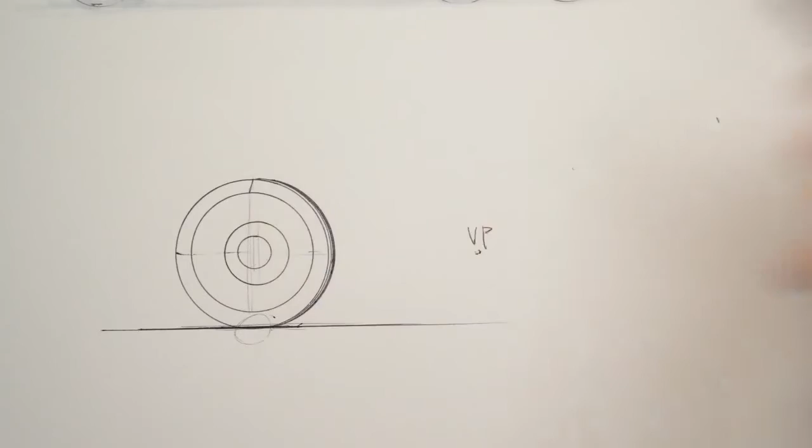So the section through here is basically, we can see my center's offset a little bit, then back out a little bit, and then this is out even further, and then this is back a little. So if I did a little cross section through here, it would look like that in perspective, assuming my vanishing point's over there.

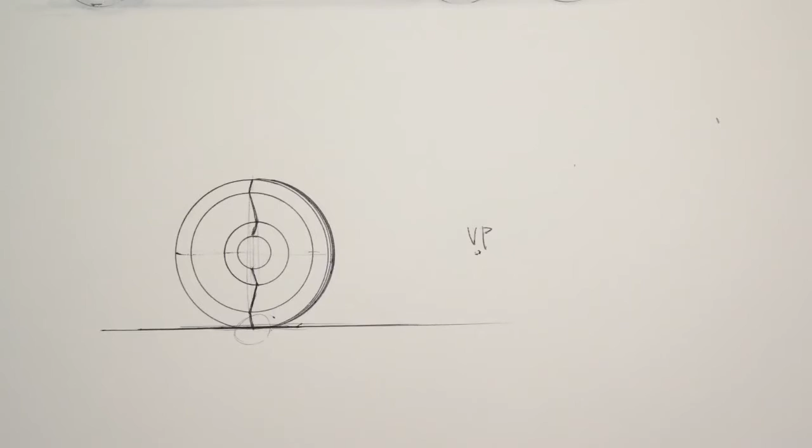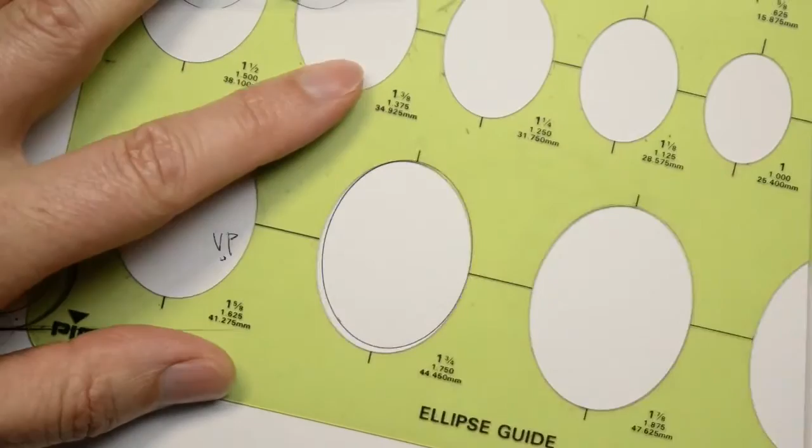So you can see we have a little slight variation. And of course, if you do that with an ellipse instead of a side view of a wheel, like I have there instead of a circle, the way you would do that is I just have a 50-degree ellipse here.

Okay, let me quickly mark off my minor axis. And then all you would do is just slide in and out along that line. I can't remember what page that is in the book, but I know that it's explained actually on a wheel. So I would do something like this, and then I would leave out actually this little bit of line work here.

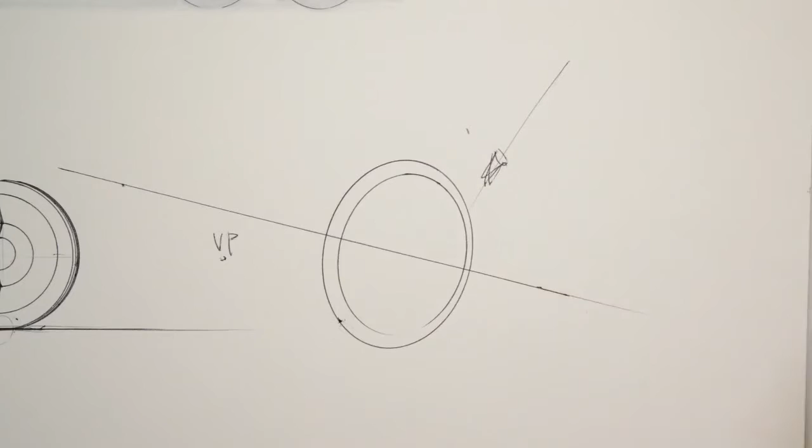And if this is my wheel, that would show like the lights shining down, right, like this. And there's a highlight right here, which sort of blows out that little intersection of the rim and the tire. And then I try to also have potentially a little flat spot there, just to connect it to the ground.

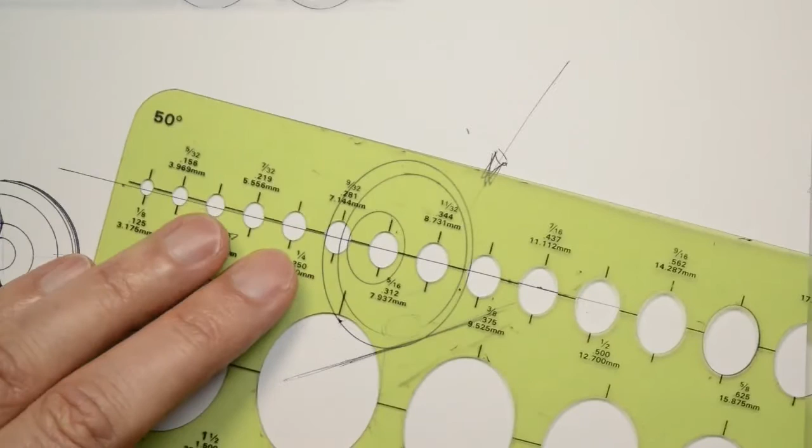So if we're redrawing that other wheel we just drew in perspective, this center then would offset. So you can go in or out as much as you like, and that'll be the amount of dish on that wheel. And then maybe the center pops back out just a little bit, like that. So that would be my wheel using that minor axis of 50-degree ellipse.

And then here's my center. I don't know if that's actually the true center, because from where I put my ground, this ground looks incorrect for this to be true vertical, because true vertical touches there and there. So that would have to be the ground plane for this perspective grid. So like that would be the ground plane.

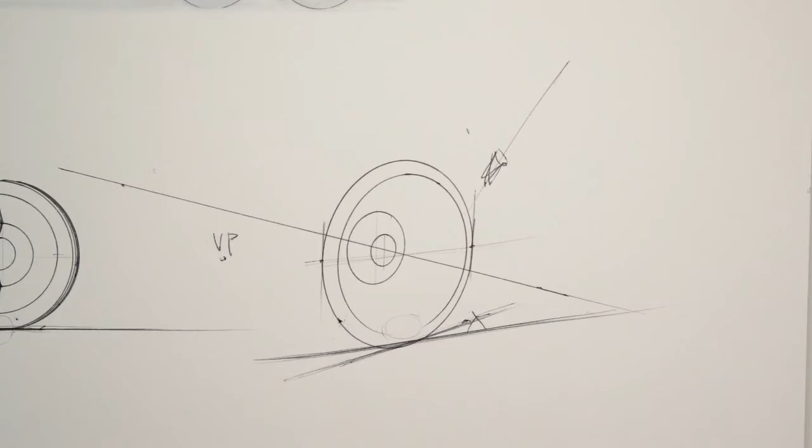And that's again earlier in the book, Thomas covered that, placing ellipses into perspective. Now I can use this true vertical with this adjusted new ground plane. Let's get rid of that one. So vertical, vertical, and vertical here on the outside.

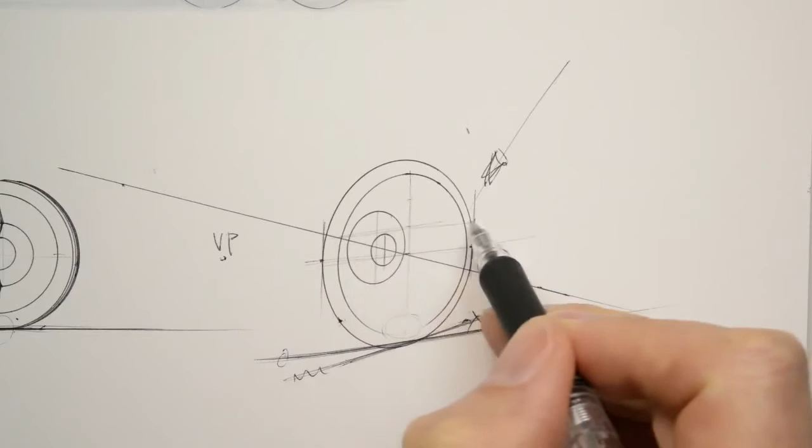And then let's just quickly put a 5-spoke pattern in here. So I divide the top into thirds, take the bottom third, extend it over, and then divide the bottom into half, and then quarter, and then just a tick below that. Those are the other points.

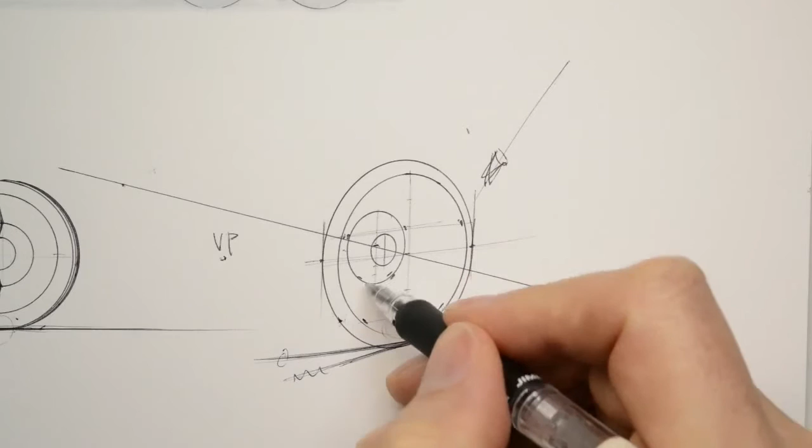And then I could do the same inside here. So that's going to go there, there, and then I'm doing it on this ring, the intermediate one, and then here and here. So I use my height line to locate those 5 points on that circle. So say we put just some slots into this, that one's going to look like that.

This one is going to be thinner. It's more foreshortened, so it's got to be thin. This one's also pretty thin. Okay, and then this one's a bit fatter.

You might say, well, how do you know exactly how thin this one is versus how fat that one is? Well, if you just add some thickness here to your height line, you can do the same thing. Draw across the top—this will be the top corner of each of those slots, and this will be the bottom corner.

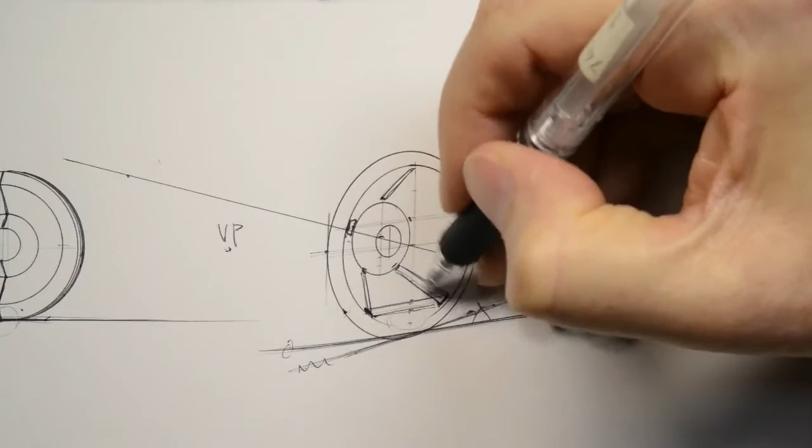You can see how on this angle of the rim, this gets foreshortened. On this one, we look more perpendicular to it. That's why this one's fatter than this one, and this one's really fat this way, but super skinny that way.

And so go around. All right, so I could do the same here. I could take the corner over, and take the bottom corner over, and make sure the width is the same. That'll tell me how to do that.

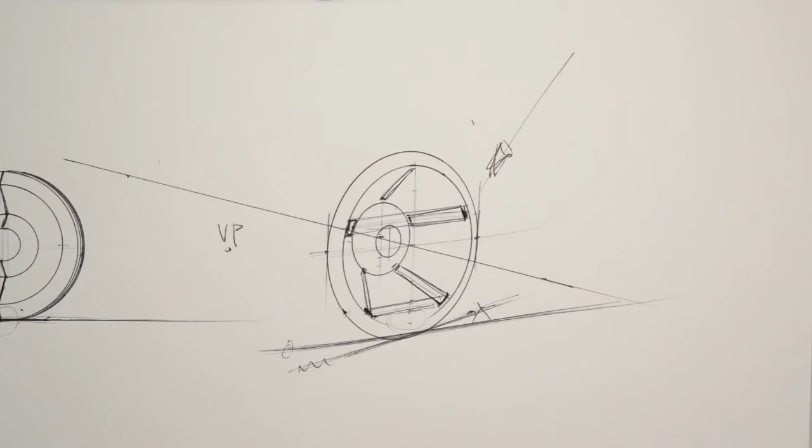So that's how I would do the wheels once they're in perspective, but let's go back and finish off this little sketch.

So with this little sketch, let's grab my circle guide again, and I tend to go in and do the wheels first. And this is not a super efficient way of sketching.

If I'm doing production work, I try to not do wheels actually ever. When I'm doing production work on a movie or video game, that sort of thing, or for toys, what I try to do is have these wheels already done.

So I might already have a Xerox copy of those, or a lot of times I'll just leave them out and leave them blank, just do the tire, and really just focus in on the body, and then scan that and replace those wheels with CG wheels that I would do in Modo, for instance. I did a lot of that in our book Drive, where I would replace and combine 2D and 3D.

So this, I think, is looking just fine. And when I'm working personally and trying to make nice sketches in my sketchbook, a lot like the sketches you see—those came out of my sketchbook, the ones on pages 164 and 165—those sketches, I would spend more time on them and detail out the wheels, trying to make a nice sketch at the same time.

And there's no time constraint for those. Those are just personal sketches. And so when I'm doing personal sketches, then I like to go in and just detail, because of how big a difference a nice set of wheels makes on a vehicle.

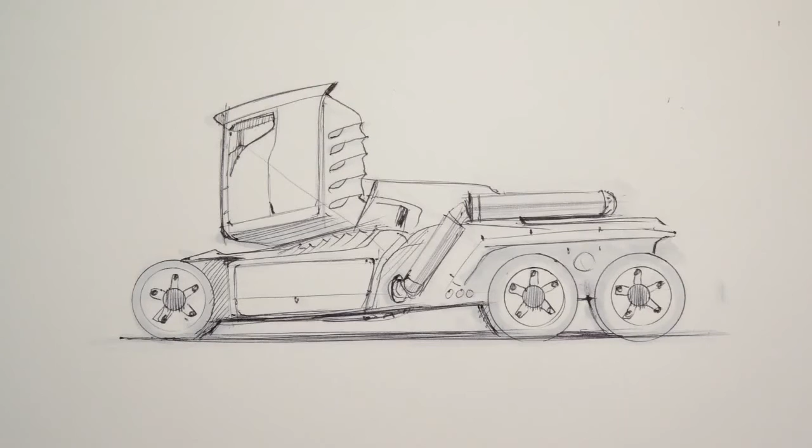Okay, let's talk a little bit about the classic quick sketch, perspective quick sketch for wheeled vehicles. The classic quick sketch for a wheeled vehicle is usually done with a very low point of view and a very long lens, but it's also a cheat. I'm going to explain why it's a bit of a cheat.

So let's think a little bit about top view before we get into this classic sort of front 3/4 low point of view. When we're looking at a front 3/4, let's just draw a small car here in top view.

Let's say it's got, let's pull the front out just a little bit like this, and let's say that the front wheel is there. So this is my top view, and I'm just looking through it. Those are my front wheels, there's the front of the car, it's got a little V section to it, and those are the rear wheels. Okay, now when I look at that, so this is top view.

Now, when I'm standing there, and this is just like the schematic that's later in the book about lenses and vehicles. So I'm jumping ahead a little bit here, but this is a nice one; we have to sort of explain this a little bit before I jump into the sketch. So we're standing here and we're looking at this vehicle. Now, if I'm, say, standing here, okay, and I'm looking at this vehicle like so.

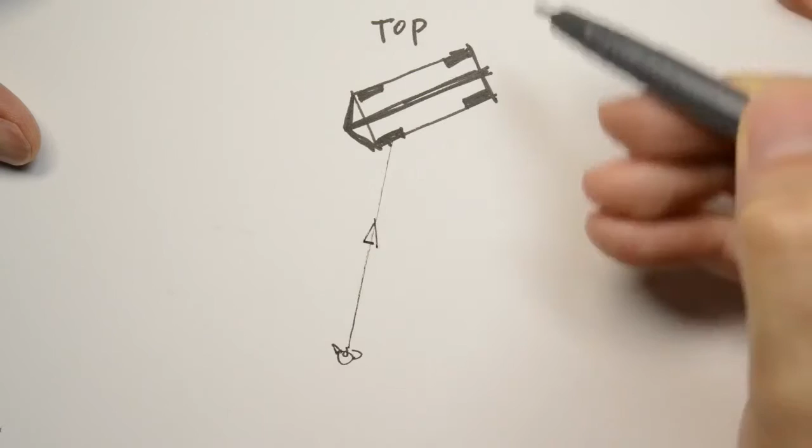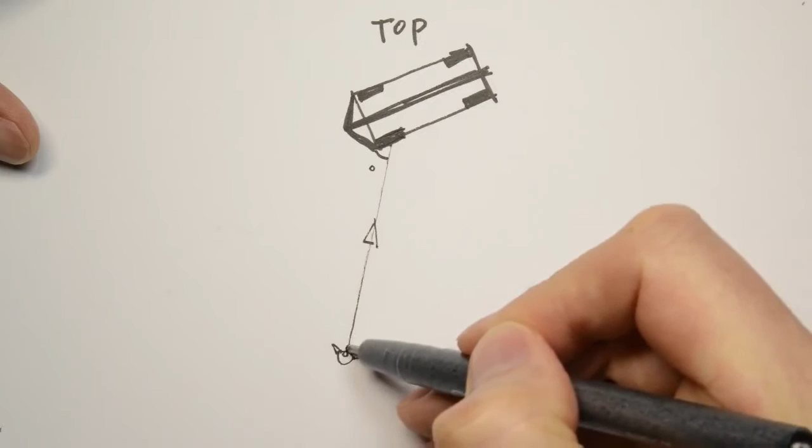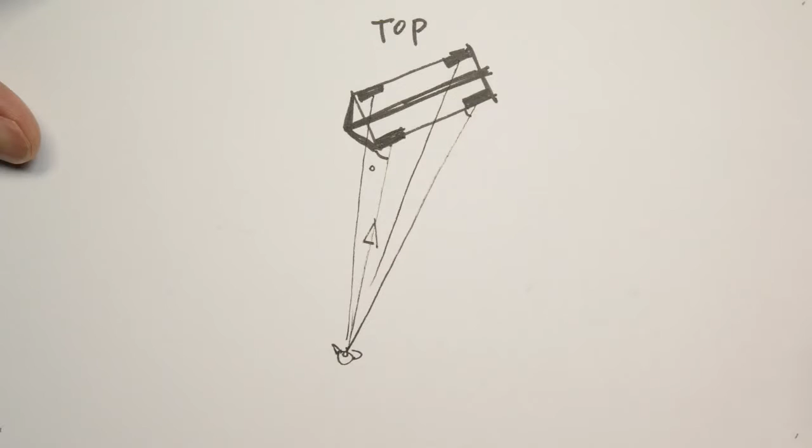All right, the angle that I view that plane of the wheel is the degree of the ellipse. So that's the degree of the ellipse. The angle I view the rear wheel, okay, is the degree of the rear ellipse. And then same thing goes for the other ones, the far side, here and here. And so you can see that this is a smaller degree. Let's make that a little bit fatter, a little pie shape there.

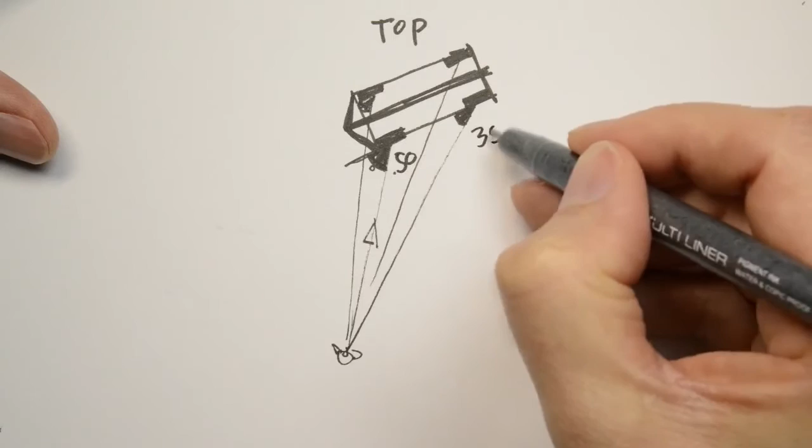And then this is, extend that plane of the side of the car. That one's much larger degree. And then this one is even larger than this one. So if this was, say, I don't know, like a 50, this might be 35 degree, and then this one over here might be like a 60. So it's like a 10-degree change from this side of the car to that side, plus, right? Plus 10 degrees to the other side. And then this one looks like about a minus 15 degrees from the front to the back.

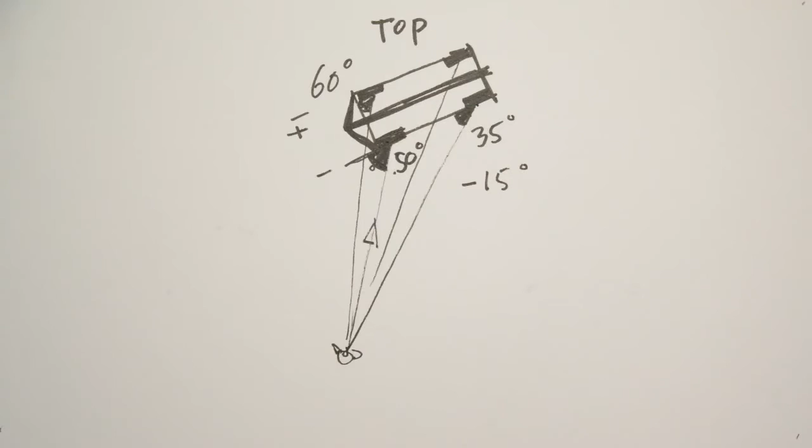So if I translate that to a quick sketch, just thinking about that grid, right? We'll start with something like a 50, and then foreshortening those three wheels, and then something like a 35, and then sort of barely see the ground plane. And then on the other side, it would be like a 60 to turn the corner, so that's 3 wheels wide, and then this one's like 10 degrees larger than this one. And then that one back there would be sort of right in between this one and this one.

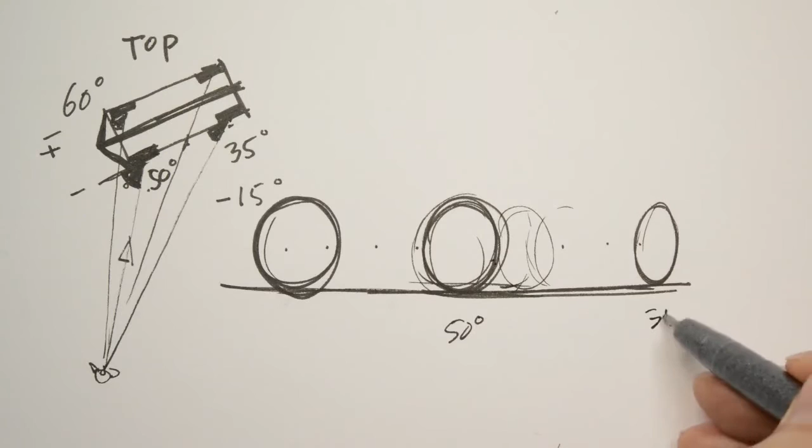So that's going to put it probably 45-ish, somewhere there, 40, 45, depending exactly where it's at. So it's probably a little closer to this one. It's probably more like a 45. So if that's a 50, that's a 35, that's a 60, based all on this top view. Now, I was just guessing, but that's my quick sketch estimate of those ellipse degrees.

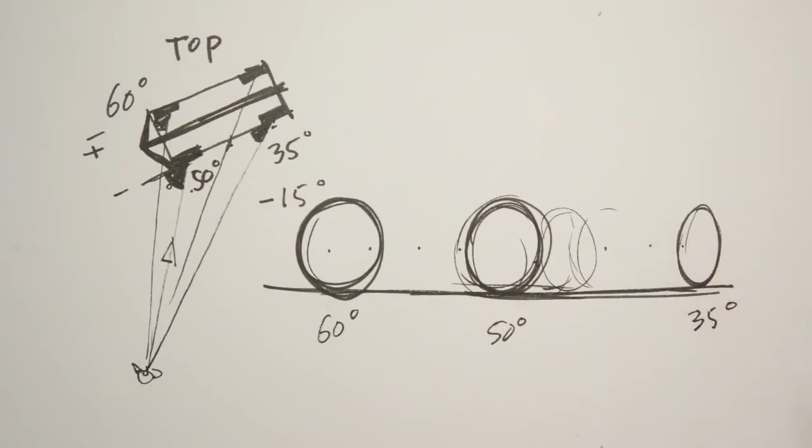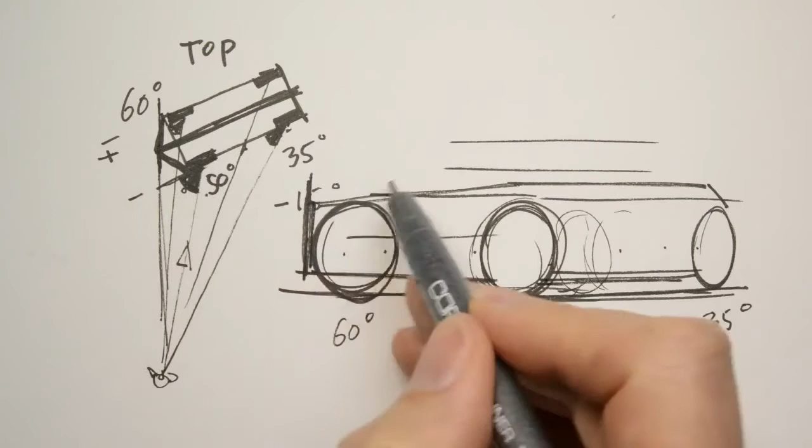Okay, the other thing that's really important before we get into this classic sketch that's going to be on this perspective grid right here, you want to also think about where's the center line. So the center line in this case, because it sticks out quite a bit, would hide the front of that wheel. So there I would actually know that the center of my car is right about here. Okay, and so that would be the center of it, and we don't see the other side. It's hidden behind, but it's only slightly ahead of the front wheel.

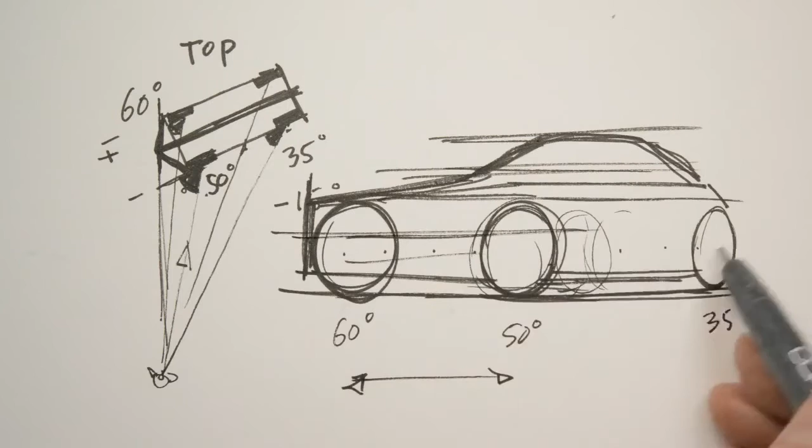And this is the way that we're going to actually measure, make a nice, really ugly car here. So that's my center line, for instance. The way that we're going to measure and place our center line and all the elements that are going to be placed left and right in this perspective with a really flat lens, long lens, which is also called a flat perspective because there's very little convergence to the right vanishing point or to the left vanishing point.

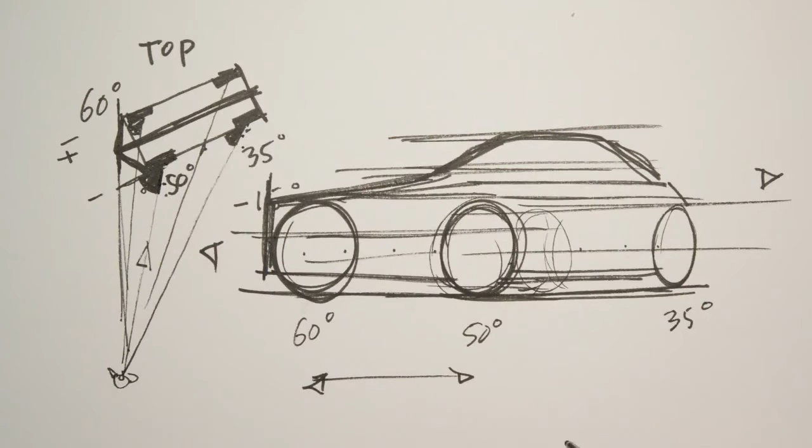So with that slow convergence, this is actually the cheat. We want to draw it with slow convergence left and right because it makes it much easier to draw the car. But if I look at how close I am to the object, I see that this is quite a big visual change from 50 to 35. So the classic cheat is to do like we're pretty close to the car for the wheels, and then to just treat all the rest of the guidelines going to the left and the right vanishing point.

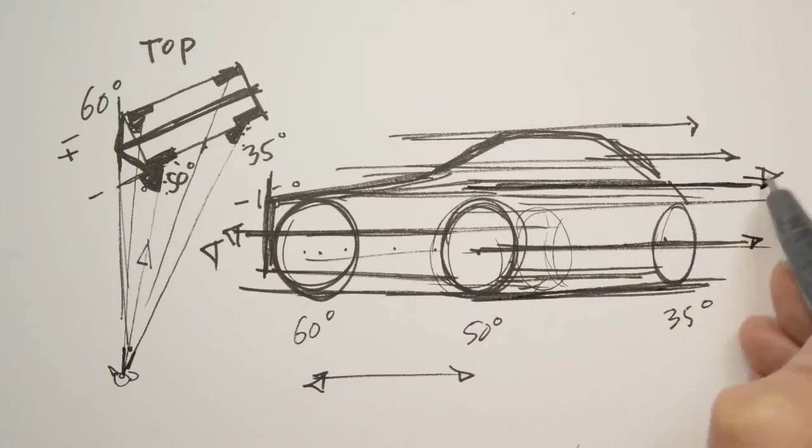Sorry, this one's going to the right, the length of the car, like through the wheel centers, going that way, or along the ground or the shoulder. Okay, going to the right vanishing point, and across the top, across the front of the windshield, for instance, that would go to our left vanishing point. But to draw those with very, very little convergence. But I can see I'm actually pretty close to the car. So this is the cheat. We tend to draw these with less convergence, okay?

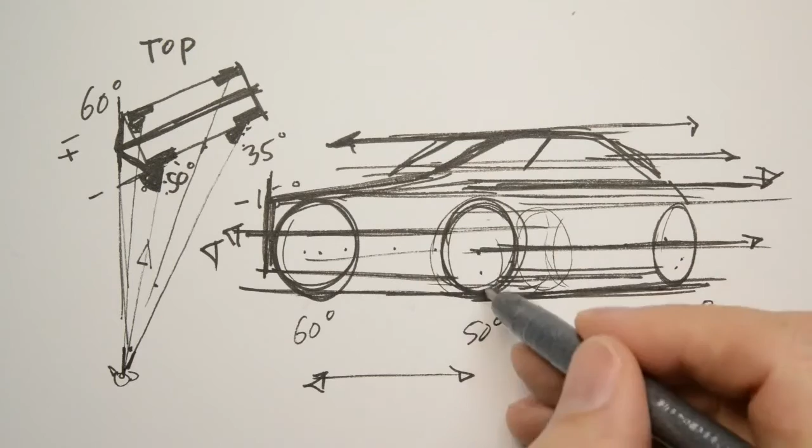And the way you could always get around it and say, oh, well, the front wheel's turned a little bit towards us, and that could increase this by 10 degrees. Because if I look at going further away from the vehicle, like this long lens would suggest, the long lens here and the flat, slow convergence suggest we're much further away from that car.

So if that was the case, and we were much further away, again, here's our little top view, and if we were way back over there, and in fact, I'm going to be out of frame, I'm going to be so far away, and if I look at, well, let's just put a little point on it, and if I draw guidelines here, sight lines, back to where I'm standing, way off the page, you can see now the degree change between here and here might only be 5 degrees from the front wheel to the back wheel.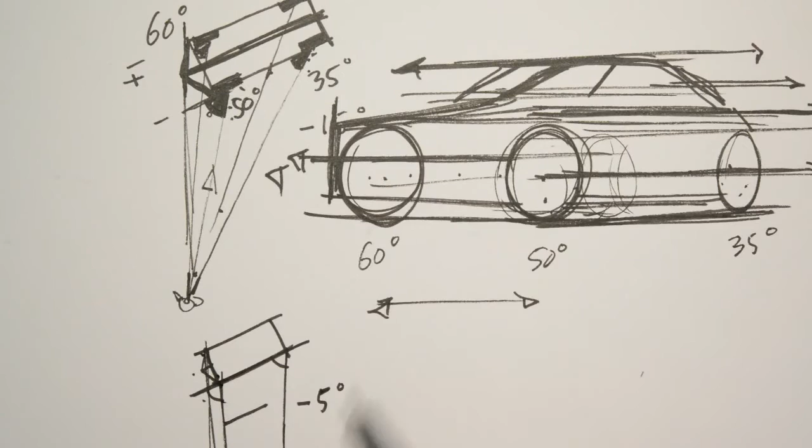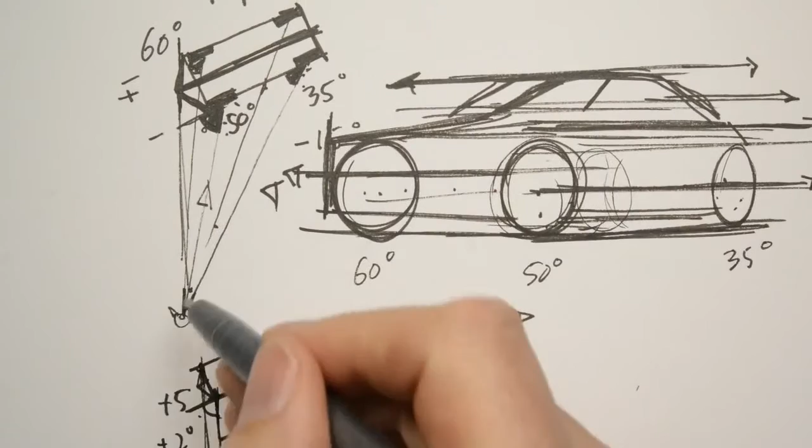And from this one to this one, it might even be the same ellipse if it's a really, really slow convergence, same degree, or maybe just like a +5 to the far side. But here you can see it's almost in line. So this one's going to be more like a +2 degrees. So point being, the degree that you sketch your ellipses with here determines how close or how far away we are from the car in top view. And how close or how far away we are should influence the speed of the convergence.

So how would we do that more accurately? Well, the box I would draw for that would just start with drawing a box instead of starting with the ellipses. And then I would say, okay, well, there's my ellipse. That's going to set the lens, right? I'm saying that's on the side plane. Let's go to the middle there. And then I would just start to multiply that down the side, and then in my fourth wheel here, I would have the proper degree by multiplying those squares. And I would have the convergence set properly.

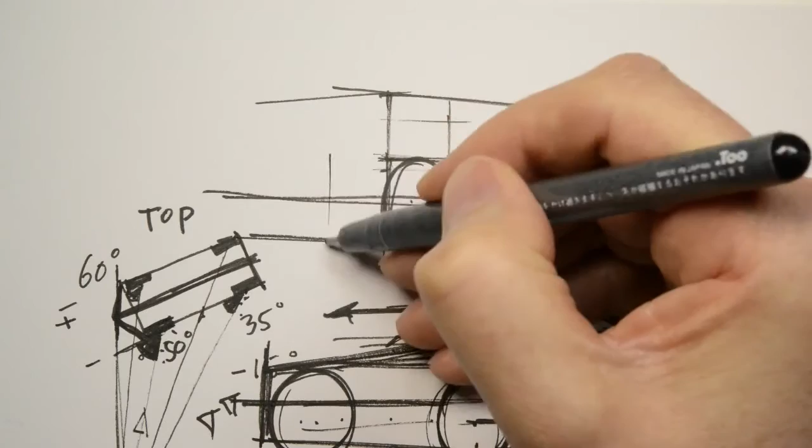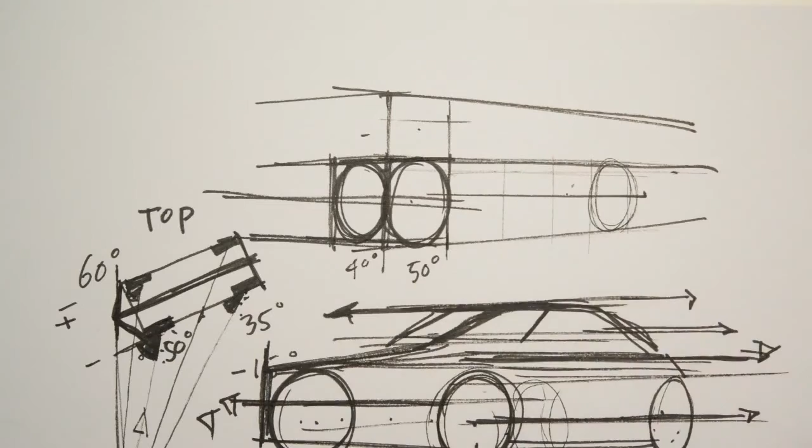And then you've got to go to the other side. I go this way. And what I like to do when I flip to the other side is, if this is like a 50 degree, then this one on the other side would be like a 40, because they equal 90, right, in this low perspective here. So if I flip the degree on the other side of that cube, those two ellipses make, then that would be like a 40. A true 45 view, of course, these would be equal, 45-degree ellipses both sides. In this case, we see a little bit more of this side, a little less of that side.

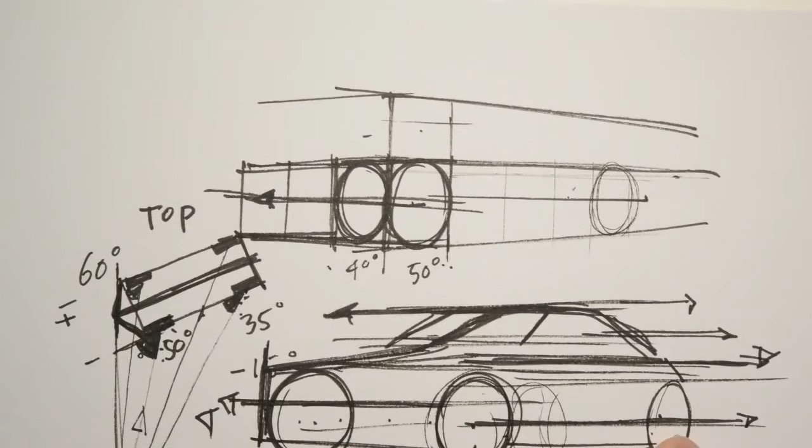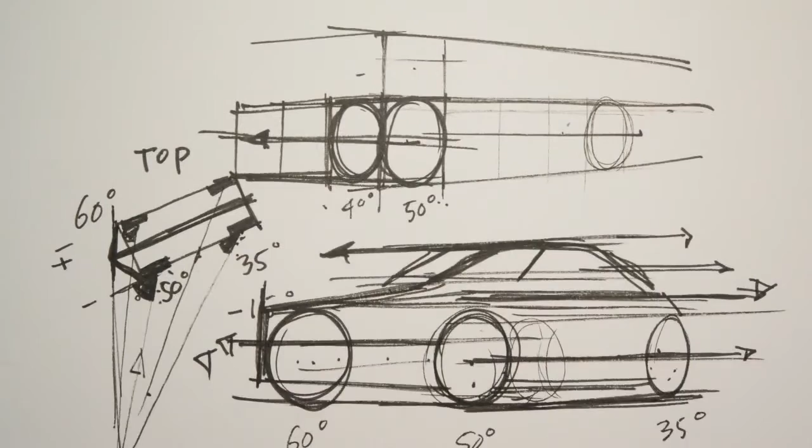And then you multiply that across 3 wheels. There's the width of my car. I could draw a box, take it across. And all this is in the chapter coming up. So I know my timing here is a little odd. But before you start drawing things in perspective, you want to have some good ideas. And that's what this one's supposed to be about. So that's back to things more like the earlier part of this, which was about just coming up with ideas first that we'll draw into perspective. So I'm jumping ahead here a little bit, but I don't want the next video to be so incredibly long, because there's a lot I'm going to cover in that one about drawing specifics of the vehicle form. So that's the underlying thought process behind how to set up the quick sketch.

So now let's actually do the quick sketch. Okay, so now let's do one of these cheated quick sketches where we just think about what we're drawing and not really so much about the perspective, just really thinking about the wheels. So the classic car sketch goes something like this. You start with a large front wheel. That sets the view, right? The minor axis is here. I can see it's pretty much level. So I'm going to draw a line level on the ground. I'm going to draw a line across the tops of the wheels.

Then I'm going to go to the back wheel. And then I even still estimate a little bit of foreshortening to the back. And then let's draw, that would be the same height wheel. And then I just throw a couple guidelines, and you can see the guidelines have really almost no convergence to the right, or to the left. So it's a very, very long lens shot. But we're still going to cheat the wheels, and we're still going to do like a 15-degree change from here to here. And then this is how I usually measure out the front.

Take that and do a little bit less, okay, as if this is a 50 or a 40 degree. And then I just take that, estimate the foreshortening across. That's the front of the far side wheel. And then I just draw an ellipse that's a little bit fatter than this one. Okay, and then I usually draw 2, and then that's going to be the tire that I see on the far side, right there.

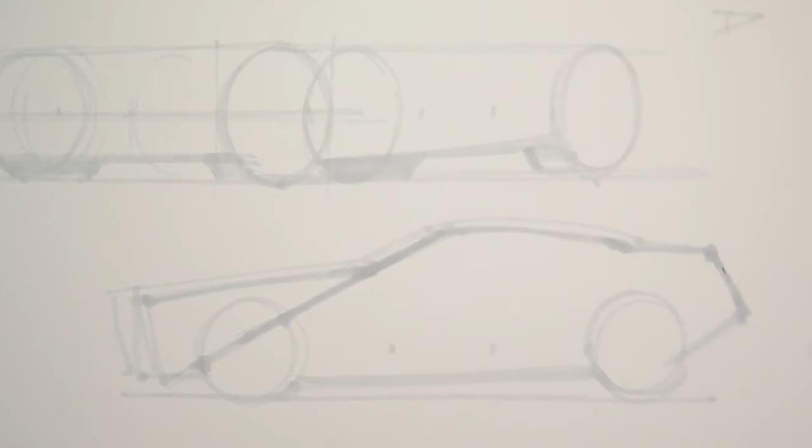So what I like to look at is that line right there, and where does that cross that wheel? And that's a key line, and then I'd like to think about dividing up the wheel itself and say, okay, what's my front overhang to the corner? Well, it's about half a wheel, a little bit more than half a wheel. What about above the wheel? Well, like a quarter above at the center.

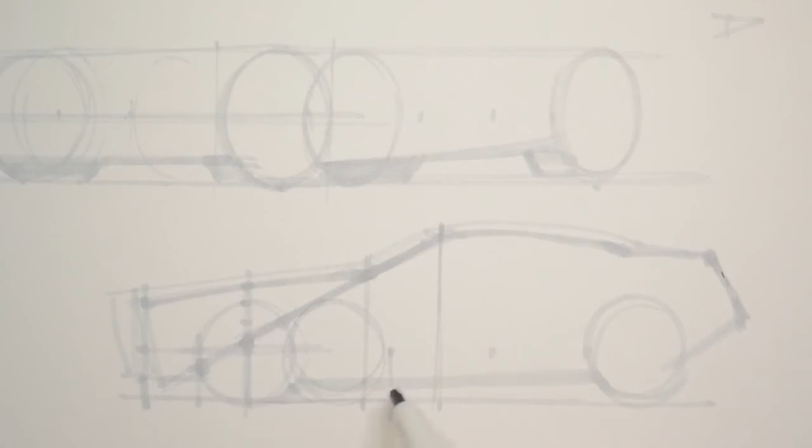And so that's how you start to transfer. It's just transferring a side view, right, into perspective, which we covered earlier. Again, I can't remember the page, but we did talk about it in detail. So I'm going to look for those angles. Well, this goes a little bit below, that goes through there. The apex is at 1.5 wheels, somewhere about there. It's about here in height, and so there's the angle. So that's that angle put into perspective.

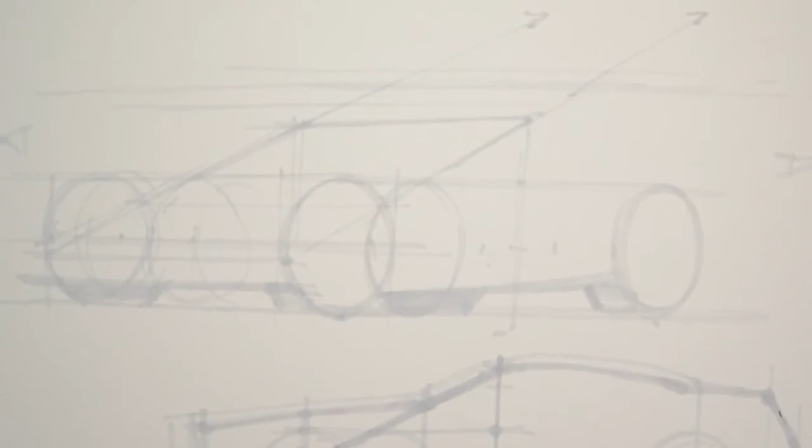There's the angle. That's actually a ramp in perspective, right? Those lines would be converging to a point above the vanishing point, the right vanishing point. And then there's no tumble home added yet to this. I'm throwing in terms now that we haven't covered, but they're in the chapter coming up, so it is explained. And it's also in the glossary.

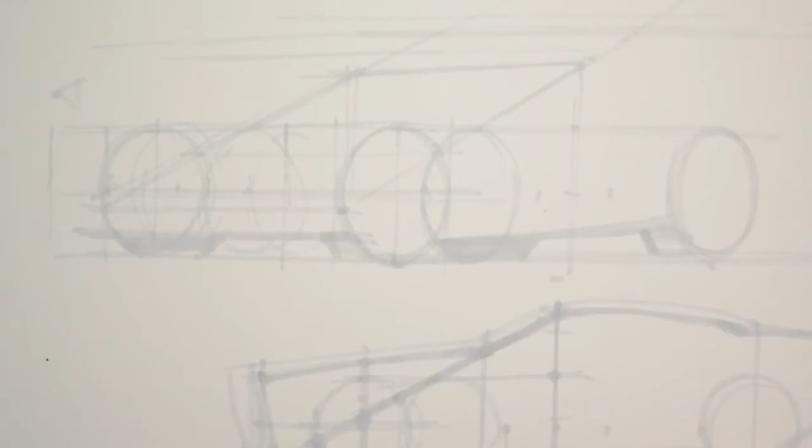Okay, if I want to add this line to the front, how do I do that? I estimate ahead half a wheel. Here, I estimate ahead half a wheel over there. Okay, and this is quickly turning into not so much the quick sketch and now a full-blown construction of this box and these wheels, but that's okay.

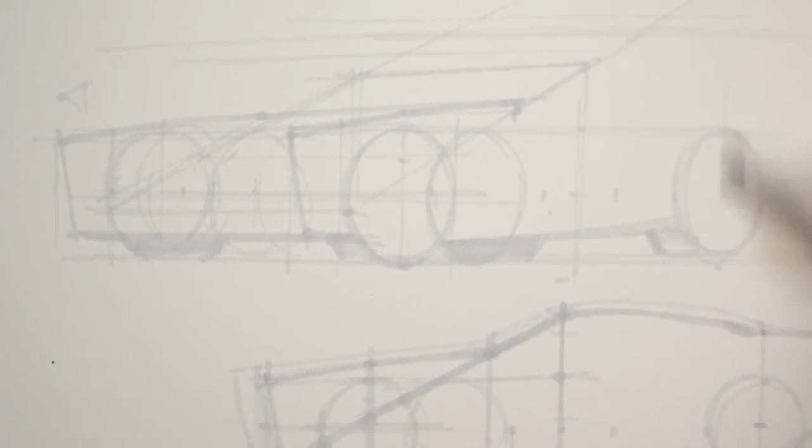All right, and then that goes over this by about a quarter, and it hits that angle right there. So I'm looking, where's the height, sort of top of the wheel out is the top of the hood, and we go to there, maybe a little bit lower, and across and back over the far side wheel, and then straight across. So you can see I'm translating that side view, and right about there probably.

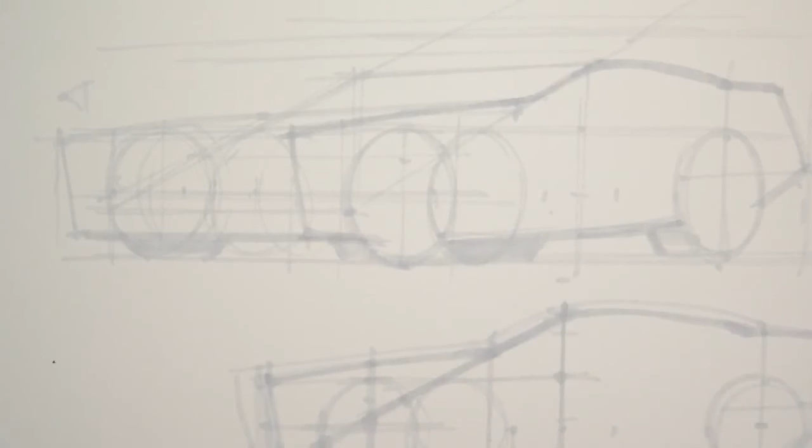And what's the overhang? A little bit more than half a wheel. There's half a wheel, a little bit more. Height is about there, and angle looks to be about something like this. Level for a bit, and then into that roof line. So there is my foreshortened side view, also similar to my center line, in perspective with my wheels.

And now we could add tumble home. I already made that line too dark, but it's okay, I'll darken it. And that's going to lean in the sides. That's going to take that pillar and move it here, move that roof line over. And then I should have found center already. I could do that here at the front. Okay, and then I'm going to pull that center line, and then I'm going to pull it forward a bit.

So now I'm just adjusting my center line, just like we did earlier with XYZ section drawing. And let's find it again here, so that's where it would hit. And then I'm going to adjust it there. So a little curvature across the roof. And now we're just basically readjusting this form to give it a little bit of a convex surface across the top. And then you can start to put in whatever details you want.

All right, then we have a grill. Maybe I want to pull the sides in to here. Pull the sides in from each side. Okay, and that's going to affect this line, right? And that's like a two curve combo right here. And then let's put another little air intake. So that's kind of where it's heading now.

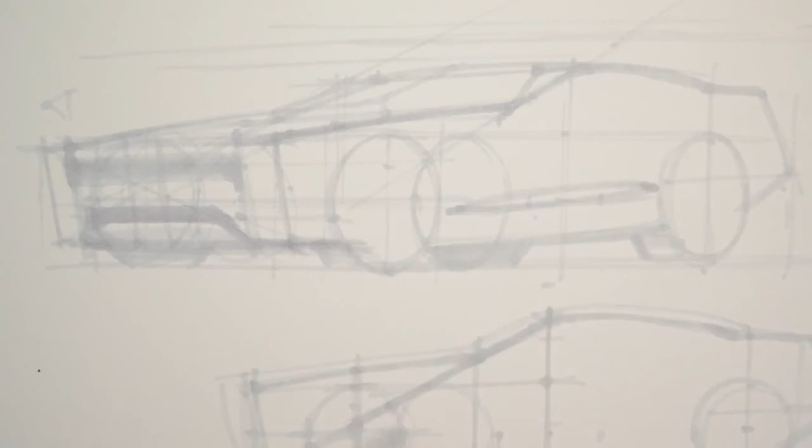That's the more technical, slower explanation of doing the quick sketch. But the quick sketch, once you've done this construction a few times, is an abstraction or just really a guess at doing that. So when you start to then draw that, once you've done the construction and you do it more from memory, then it becomes more of, let's just use a nice dark pen that you can see easily. Then it becomes like this.

You set the ellipse for the front wheel. We barely see some of the ground plane, a couple of tick marks to get my proportions for the rear wheel, and then estimate my width, 3 wheels wide over to there, and then maybe I just draw something like that. Add a little thickness, little thickness, little thickness. Maybe see the far side back tire, a little bit of rake, a little body sculpting, and headlight shape, and then foreshortened wrapping headlight shape on the other side.

Angry mouth. This line comes around here like this. Ground plane. Like to have those wheeled vehicles connected to the ground. And then up, and then pillar down the back to the rear of the car, and then up and over. This is a 2 curve combo, and there's the base of the windshield, incorporating some tumble home, window graphic, header across the top of the windshield, door cut, and maybe a little design line or a little fender blip.

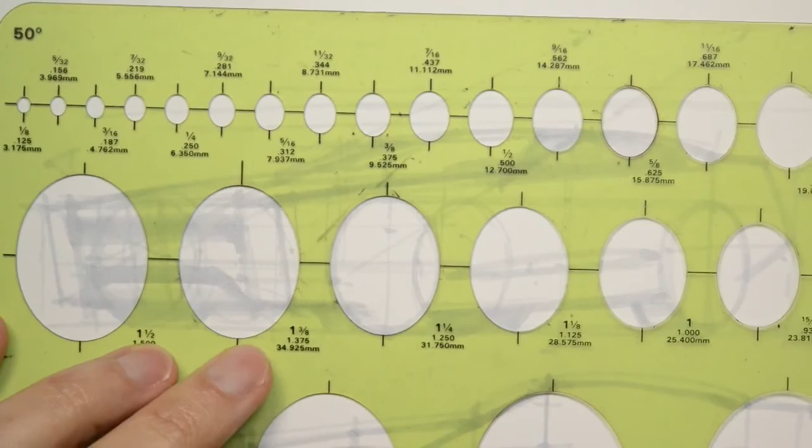And in fact, now I could go back with this one, add a little bit of quick line weight to it. In fact, let's tighten it up with some ellipse guides. Let's see how close I was today with a 50, a 35, that's what I was guessing at, and a 60. Those were my estimates. Let's see how I ended up. So what you do to clean it up, just what I showed before. My 50 is looking pretty good, like a 50 actually.

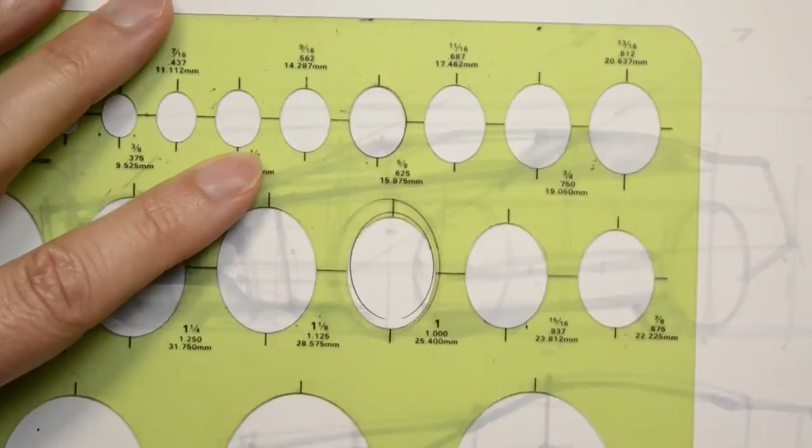And what I do is tire outside, and then I let it fade to the front because it has a soft radius on it, and then wheel. And I offset it a little bit to show that there's a little section to my tire, and then let's throw a little deep dish center on it, like so. Now for wheel well that cuts over the wheel, and I'm just going to darken the ground and the connection to this front wheel here.

I'd like to now add a little bit more convergence, so pick that line up a bit and let it converge. All right, so that guy's going to go up just a bit, so I'm building in a little bit more realistic perspective convergence here. So this one's also going to come up a little bit more, so we see a little bit more of the ground plane. So over there we see a little bit, and then we can see a little bit across the back of the shadow here of the car in top view.

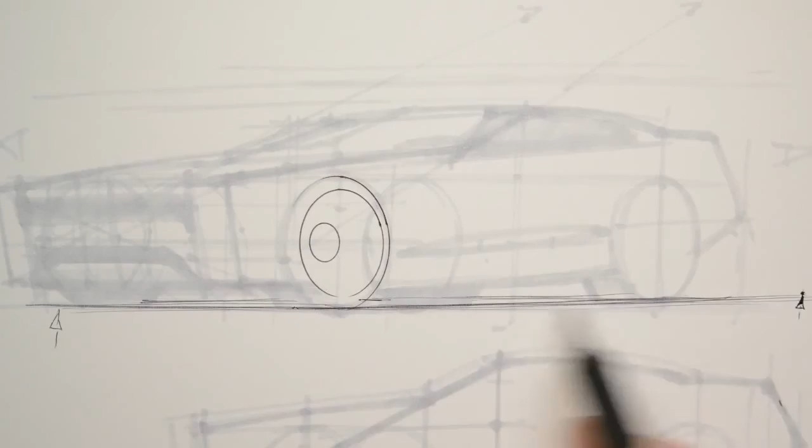And what I do for the wheel well, if it's supposed to be a round wheel well cutout, is take the same ellipse guide like this, and then I tilt it a little bit because I know the side body is probably, we're looking at the front view, and here's my tire, right? And here's the ground. Here's the outside of the car. Probably we've got a little ground clearance. We've got a little wheel well that covers the top of the tire. So it sticks out a little bit, and then probably a little bit of side body, shoulder, fender lip, and then rolls back under, generally speaking.

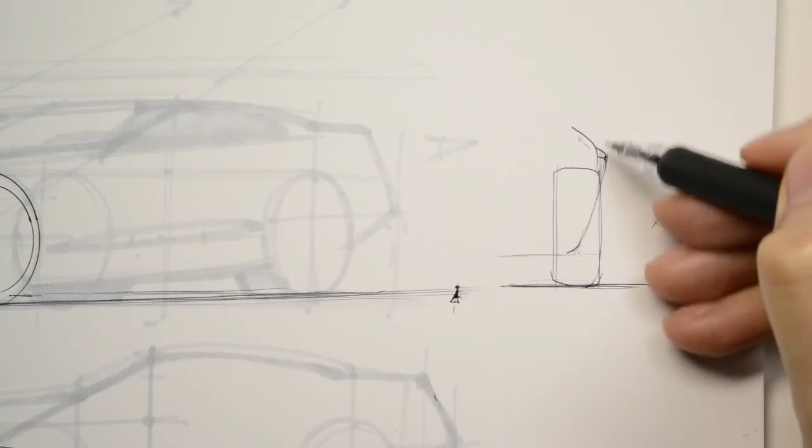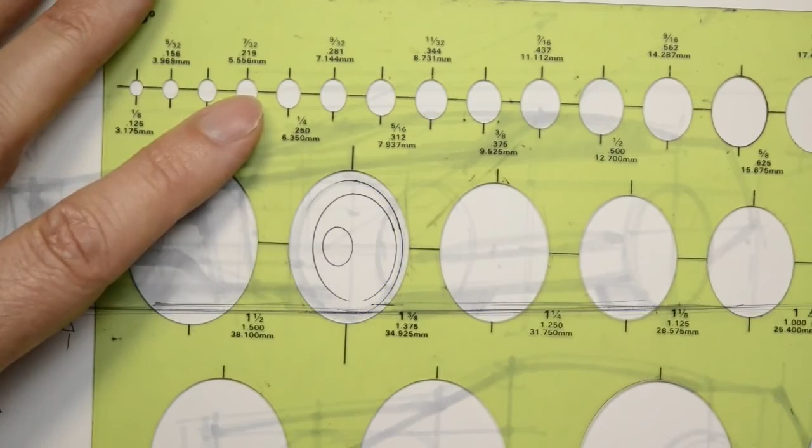So I want to set this, but you can see the ellipse here is still basically on a flat plane. So I just want to set the same degree ellipse, but angled. So that means the minor axis for my wheel well is like this, and the minor axis for my wheel is here, which is the axle. So what I like to do is just take the same degree and just tilt it a little bit. That's the quick way to do it. So a little bit of a gap, and then I like to pull it out a bit so it covers the tire, and tilt it a little bit.

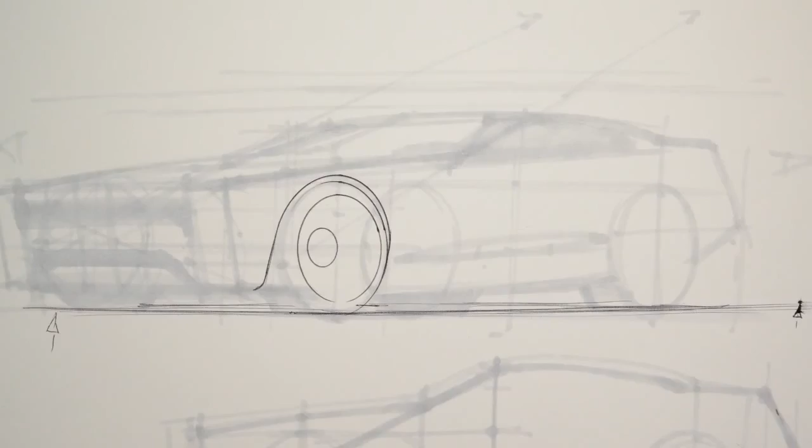I usually only draw the top, something like this. Okay, and then it's going to have to be influenced by the side body and straighten out and then curl under. And then this might actually go behind the tire. So I do the same at the back. You see a different degree. Let's see how close my 35 was. Not bad. I'll make it a little bit larger wheel on the back, so a little smaller front wheel, larger rear wheel.

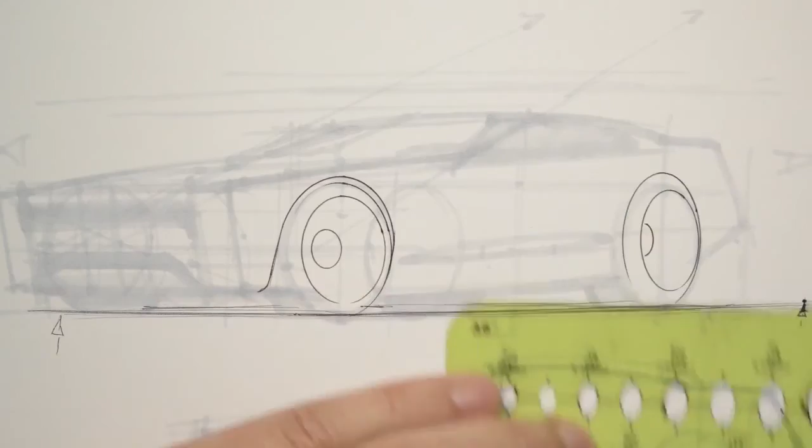And that's my tire. I should have marked my minor axis. If I was trying to be more accurate, I would do that. And let's really deep dish that one. Tire is there, so maybe wheel well here. Rear wheels don't need as much clearance because they don't turn while they're moving up and down. The front wheel moves up and down while it's turning, and that means you need a larger wheel well at the front. And let's do something like that.

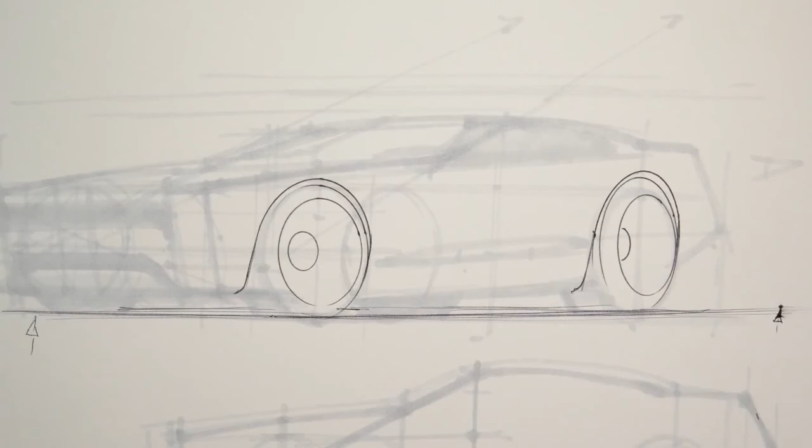So you could see, just start now sculpting and adjusting the forms. And if you don't get it first time, no big deal, right? This is just a quick rough sketch, and you just do an overlay, and then you adjust it. But if you drew it accurately enough from the beginning, you could have something that you can do an overlay on. So now I'm slowing down because I'm starting to think about design, and of course that's going to slow me down, because there's not much nice design happening yet on this one. But those are the basics and how you would go about building those basic forms.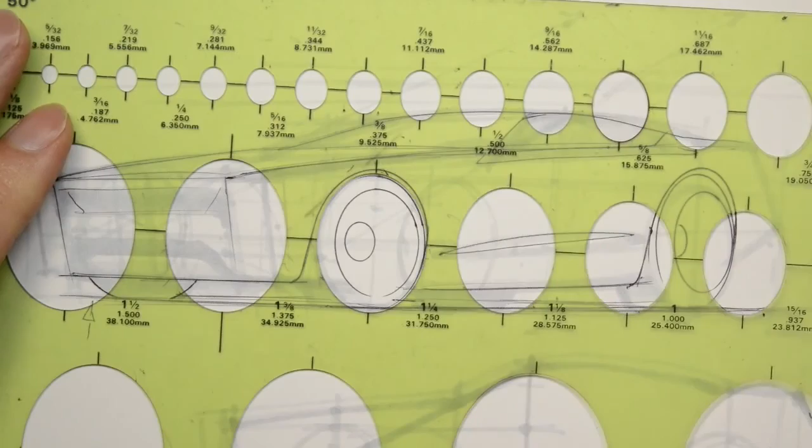And then on this one, we could use the same idea. There's the tire. There would be the front radius, then we add a little thickness. And so we see something like that connecting. So those are the basics, of course. The proportions aren't very nice, but that's all about design and not about the drawing steps necessarily. And that's how I would build that. Hope that helps.